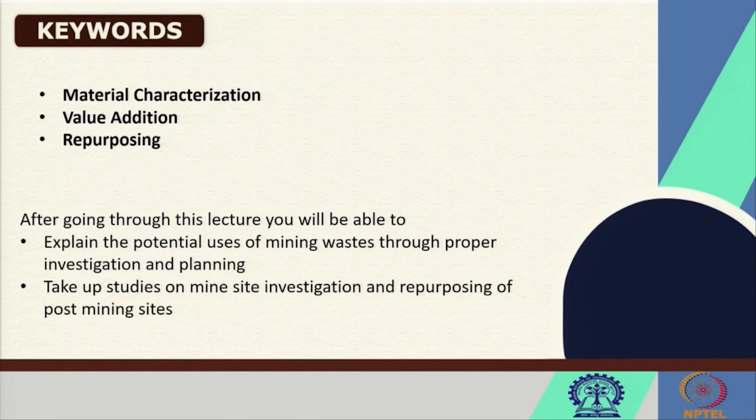For this, it is essential that you get material characterizations done. You will have to know the chemistry, the different testing facilities for geochemical characterizations, and how you can add value to the waste material. But here you will only be learning about the approaches. The detailed work of characterization or value addition will come when you want to get it done, and that will not be done by your own expertise. You will have to hire expertise for that purpose.

But for this repurposing as well, your first task as a mining engineer or environmental engineer is to conceptualize the repurposing, which will be discussed here. After this lecture, you should be able to explain the potential uses of mining waste through proper investigation and planning, and carry out clear investigations. You can then take up studies for mine site investigation and repurposing, identifying what expertise is required and with whom you will build your team. That is the purpose of today's lecture.

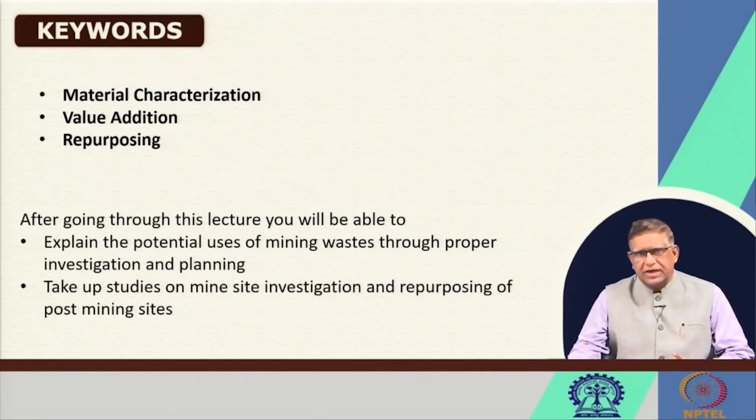Now, what exactly is the resource we are talking about? These are post-mining resources - resources lying at the post-mining site. As we must know, the definition of resource is a stock or supply. That is, it could be money, material, different stuffs, or assets. Exactly, this is the physical material constituting parts of the earth, whichever is there at the time of closure - that will be considered a resource.

But resources can be owned by an individual or an organization. Whether it is an individual resource or organizational resource basically depends on the functions that this particular commodity, stock, or money can perform for you or your organization. That is why resources must be technically accessible, economically viable, and culturally appropriate.

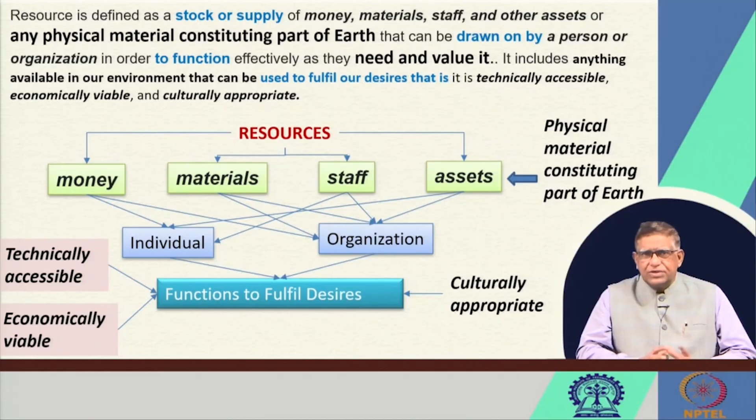So your rice is a resource, but you can use it for making liquor, and then create nuisance in society by getting drunk. That is not culturally appropriate, though that same rice is accessible to all community, can be sold, and from there you can not only survive but bring business to your village. So this basic concept of resource should be clear to you.

Natural materials become resources when humans value them - anything lying around may not be a resource for you. That is why in an abandoned mine site, or after closure, you find a lot of materials lying here and there, land lying there, but if you are not valuing it or making use of it, then it does not become a resource.

The uses and values of resources change from culture to culture and from time to time. In the past, timbers and logs were just cut down and burned to drive away wild animals. But as culture developed, they built beautiful houses with fencing using those same logs, and lived more happily. So culture makes use of resources differently. Resources can be an available means, a natural source of wealth or revenue, a natural feature or phenomena, or any computable wealth.

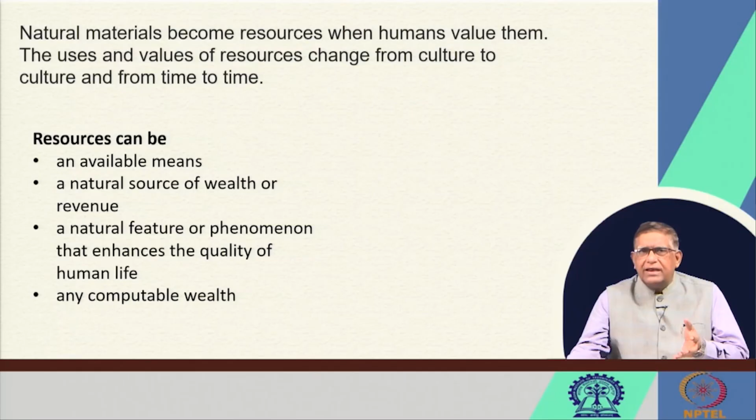And that's why the type of resources could be a renewable resource and non-renewable resource, and then another type called flow resources. There are many natural resources that do not depend on the influence of man, but are neither renewable nor non-renewable. For example, solar radiation, running water, tides, geothermal, landfill gas, biomass, and wind. These are flowing and varying over time, and they do not have a regenerative capacity, but they are also not getting exhausted.

We are getting air, and still in our air we are getting at least 20% oxygen, but it circulates in a flow in a different way. So those are also resources.

Now, resource reuse, which we are talking about today, means whatever is left in the mine site, for the same purpose we can use it. That means there may be a building, a pump, or a water distribution system, and as it is there you can use it for the same purpose of water distribution, or you can take out that pump and use it for other purposes.

Maybe because there is no longer a mining office there, you take out the water supply pump from there and put it in the nearby overburden dump, on which you might have done vegetation, to supply water for irrigation purposes—you can use it there.

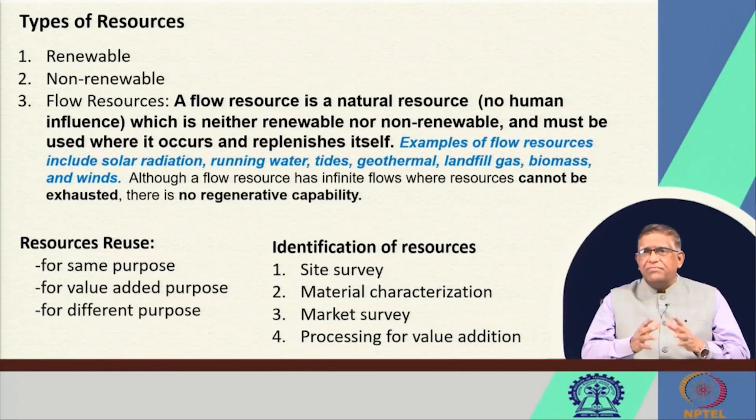So we can find out if such materials are lying over there, collect them, and then engage the local community to revive some of their ancient modes of art and painting, which can have an international market. So we can do this type of processing and value addition of some of the materials lying over there.

For reusing mining waste, you will have to do characterization of the mining waste, which will reveal the potential uses, such as a source of minerals to re-extract, maybe from gold mines, or polymetallic minerals where only one valuable mineral was extracted while others remain in low quantity lying in tailing dams or overburden dumps. In a gold or copper mining overburden dump, there may be stibnite, antimony, or other materials which can be taken out.

Coal mining waste may have residual coal and carbonaceous shale lying there, from which fossil fuel can be extracted. If it can be processed, it could be sent to a power plant for a different type of use.

Then there's the source of construction materials, an area where a lot of work has been done, such as manufactured sand being prepared inside Western Coalfield, repurposing material lying in waste dumps. Similarly, some of this material can be crushed and mixed, then used as a substitute for natural aggregate which would otherwise be mined from other places.

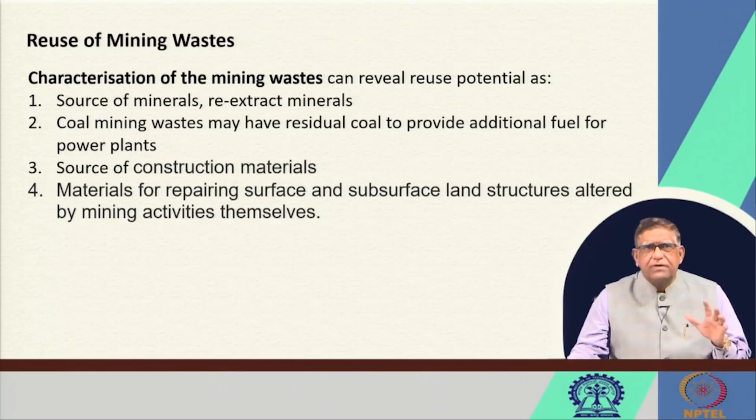Materials can also be used for repairing surfaces, meaning underground backfilling purposes, where you grind, crush, and put the material there. Similarly, you might have seen waste from thermal power stations, fly ash, going to underground mines for backfilling purposes. So different activities can be done with this.

But there is a big problem worldwide. In South Africa, there will be more than a 10 to 13% increase, as estimated in 2017, about 68 million tons, expected to reach 87 million tons this year. It's a huge quantity in that country. Similarly, in the US, mineral ore waste generated is about 1.6 billion tons. That means it's a huge quantity.

And in India, our scenario is we have 1531 operating mines, mining 95 minerals, which includes 4 fuels, 10 metallics, 23 non-metallic, 3 atomic, and 55 minor minerals. A huge quantity of minerals are being mined.

Now here, everywhere the mineral concentration is not uniform. In different places, different degrees of waste will be generated. So if we see the Indian mining waste generation, one study is very urgently required to find out and have proper data or information about these wastes lying there, because if they are not reused and properly managed, they may create environmental hazards.

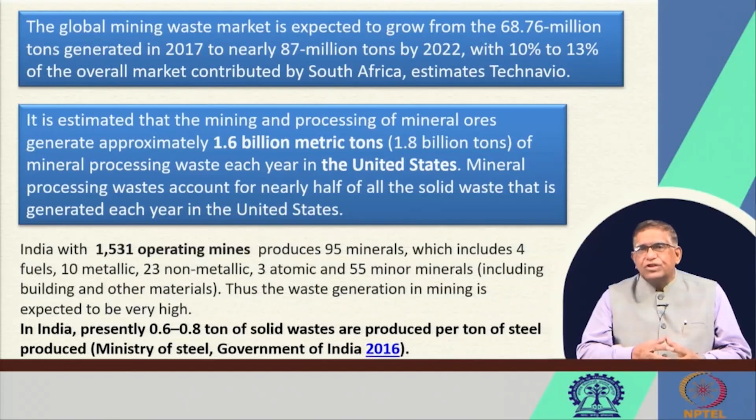Now from there, how it can be reused, a lot of things are there in the cement plant, because in iron ore making, in slag you add limestone, keeping a lot of calcium oxides, and that's why this can be used in the cement industry. So we have a lot of possibilities of using that material.

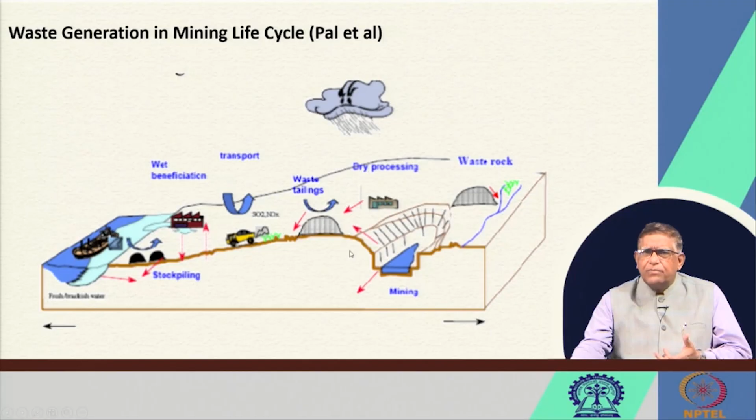Repurposing is exactly getting the beneficial use of the closed mining or other industrial operation, through value added reuse of the land. As you have seen, you might be having this pit, may be overburden dumps and all that, this is a different type of topography. Now how can you make it a different type of land use?

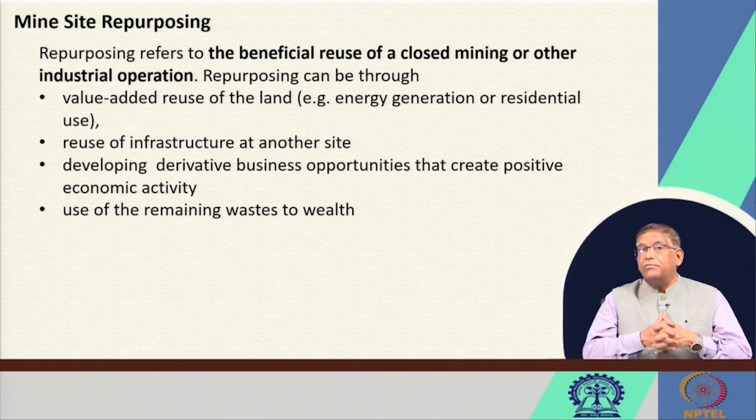So whether you can use it for energy generation, that means solar panels and wind panels may come over there, or a residential township can be developed, or reuse of infrastructure at another site, or developing derivative business opportunities that create positive economic activity, or use of remaining waste to wealth, what can be done.

So this transition can take place through rehabilitation or remediation, that is you can create a non-polluting environment where there were pollutions. Now you can regenerate and reclaim, restoring degraded ecosystems, whatever has gone wrong you reclaim it, and then you can repurpose the mining infrastructure and landscape for other activities.

That repurposing is other than mining, something as a sustainable business can we develop, and sometimes it can be co-purposing, meaning developing beneficial activities on site during mining. Where mining is going on, at the same time you are developing certain things, like fisheries, agricultural land, horticultural land, simultaneously.

Or if you are having huge good sandstones, you can bring artists and sculptors to make a lot of different type of sculptures that can be sold, and engraving from those sandstones. Many of our mining sites have had a lot of such beautiful sandstone which could have been created into monuments for different hotels, buildings, and places.

We do not have many rock gardens. Even the places where we teach mining engineering or geology, those institutions don't have a rock garden. That rock garden could have brought lots of overburden materials, could have been converted, provided we have done that co-purposing. We are developing different types of CSR, bringing artists, making artifacts and putting them over there.

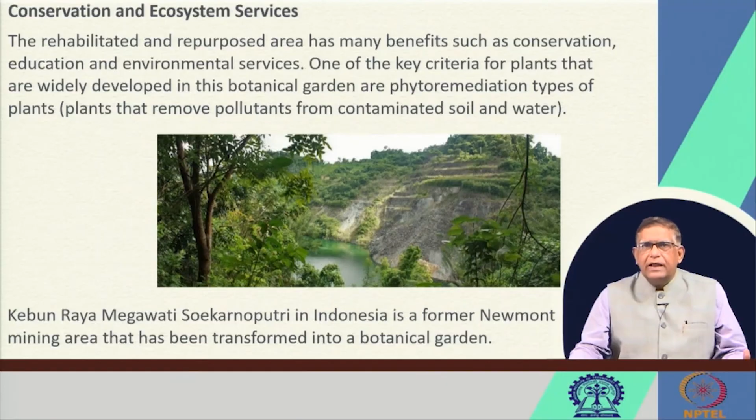Similarly, you can think of what China does. This is a Chinese mine. You can see it was an abandoned mine quarry. In the abandoned mine quarry, what they have done is create the Shimao Wonderland Intercontinental Hotel. This 16-floor hotel has come up starting from this pit - a mine pit where the pit water was, I think it was a limestone mine. So they have taken this over and created a mega structure like this.

So similarly, we have also got many stone quarries. Nothing is there - in many of the manganese mines, like Tata's manganese mine, old quarries are lying there near the Barbil area.

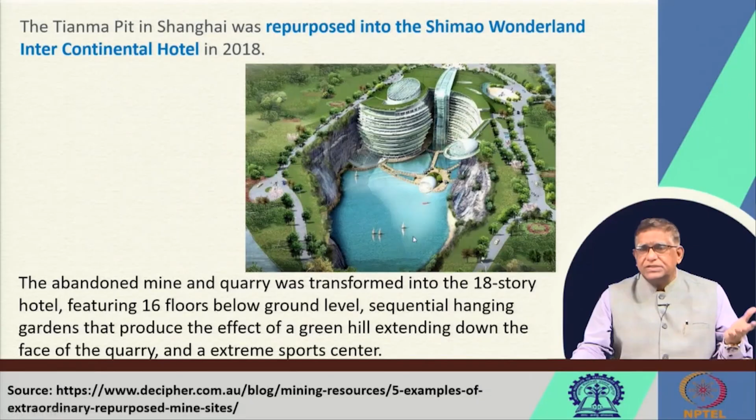But nearby, in some other places, some quarries like this are also potential places lying there. So we need to do that repurposing.

So when we do this, you can see another example. This is how in Norway people have done it in an underground mine. This mine, the Lefdal mine, has been converted to a data center - a data center which requires a huge amount of power and servicing. Huge data centers have come up in this old mine. Why can't we do similar things?

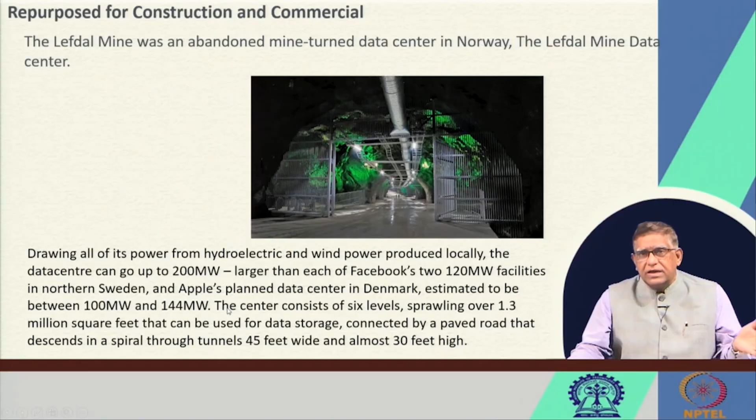We can also do this, but we have not done it. Even now, we have not studied how we should repurpose our Kolar gold field which has closed, our Kudremukh iron ore mines which have closed, and there are many closed coal mines around. Even very recently, 21 mines of WCL were closed, but we do not have any repurposing plan.

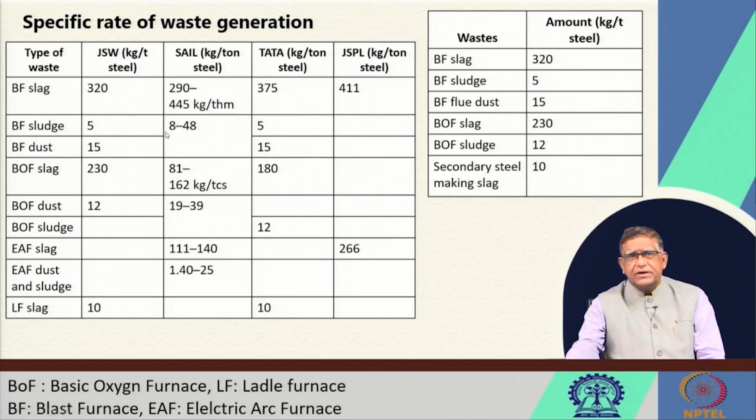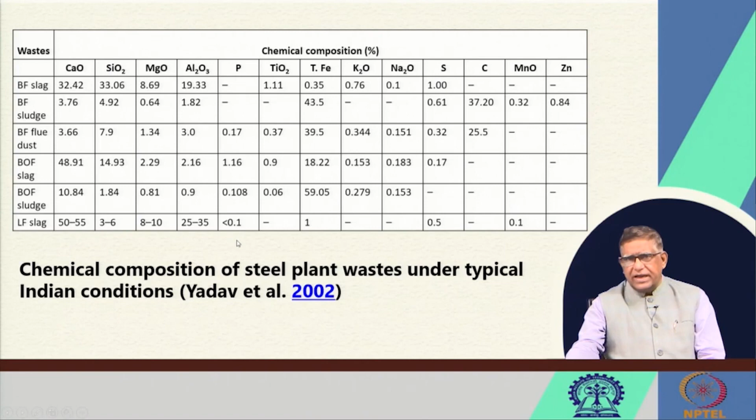But there is another thing which to some extent we have done in our country - we do find out how much slag gets generated. The steel plant waste has been characterized well, and different steel plants produce different types of slags which are characterized and can be used in cement plants and other plants, which is also being used to a certain extent. There is other material too, which can be made into aggregate for road making - that is granulated blast furnace slag, which can be used in cement production.

Some of these materials have characterizations that tell whether they have pozzolanic nature, which determines the type of cement they can be made into, like granulated blast furnace slag, which is pozzolanic in nature and naturally fit for clinker in the cement mix. In the cement plant they take out a lot of the slag, but some still remains lying there, and because it is alkaline in nature, it increases the alkalinity of the soil.

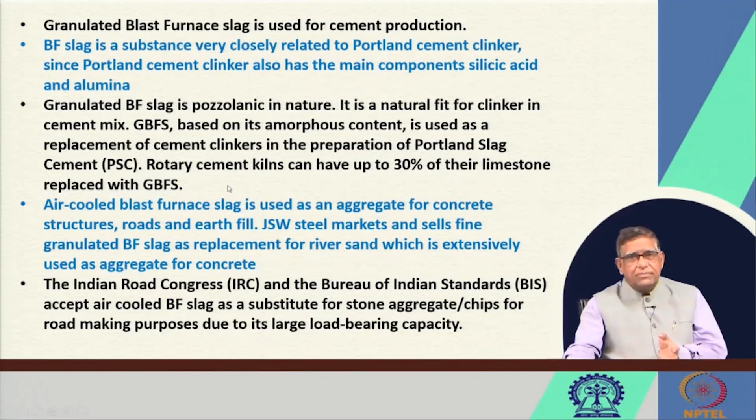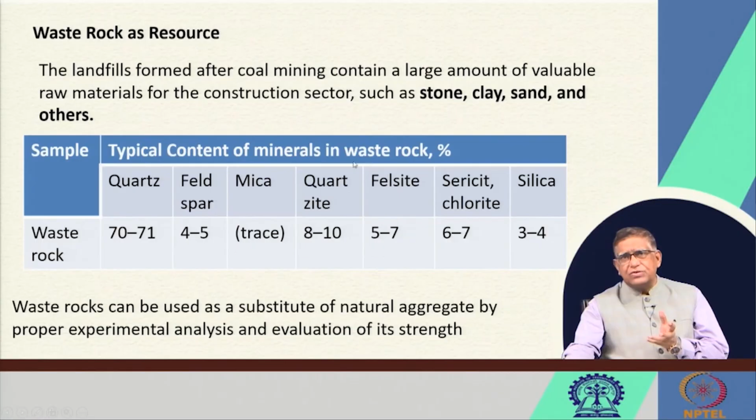So we need to study how to handle that. The waste rock, other rocks available at the mine site, can also be used, because there may be quartz, feldspar, mica, quartzite, felsite, chlorite and silica. All these things are present as stone, clay, sand and other material in the overburden site. Some of them can be used for construction purposes, road making, and other things.

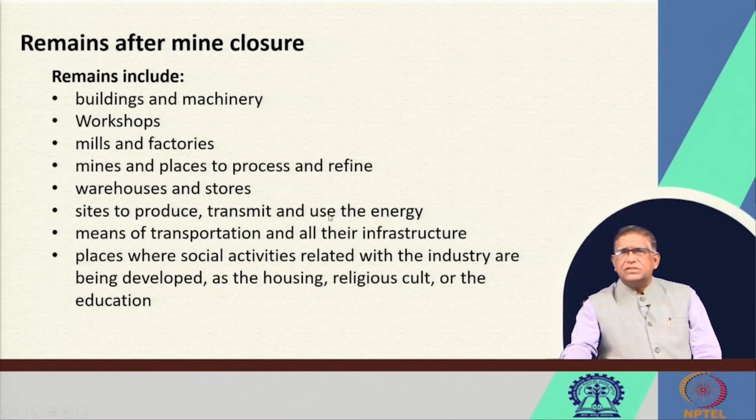The remains after mine closure include many buildings, machinery, workshops, mill factories, mine plant and processes, warehouses - so many things are there. You need to find out how they can be used. That is the reuse of the remains and the waste-to-wealth conversion. This has to make you think of how you can recover the value.

Sometimes, as we discussed in our previous class, we do the demolishing before relinquishment. We demolish things, recover some material, and then use the site for repurposing. That repurposing could be development of ecotourism, edutourism, edutainment, entertainment, or other commercial use.

Sometimes I mention that in our cities like Lucknow or Calcutta, there are a lot of jails. The jail where criminals and qaidis are kept blocks a lot of space in the main cities. Those jails can be shifted elsewhere, and the labor of the criminals in jail can be used for reconstructing those sites, releasing a lot of commercially valuable space in the main cities.

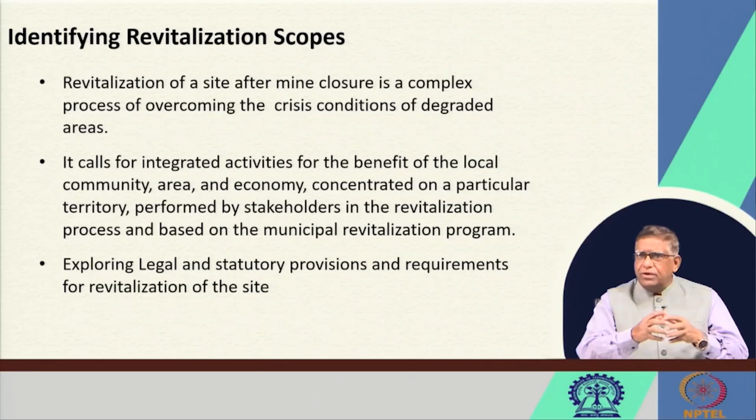Identifying the revitalization scopes and revitalizing the site after mine closure is a complex process of overcoming the crisis conditions of degraded areas. So revitalizing is possible, but you will have to investigate, and then find out what type of post-mining use you will be making - whether agriculture, forest, aquatic, natural, economic, or cultural aspects.

So when you want to do post closure or abandoned mine management and think of reusing, you will have to do a little detailed investigation. There are revitalizing procedures that they follow in Poland. You can go through the net, and you will have to prepare some of these types of flow charts. Just try to study them.

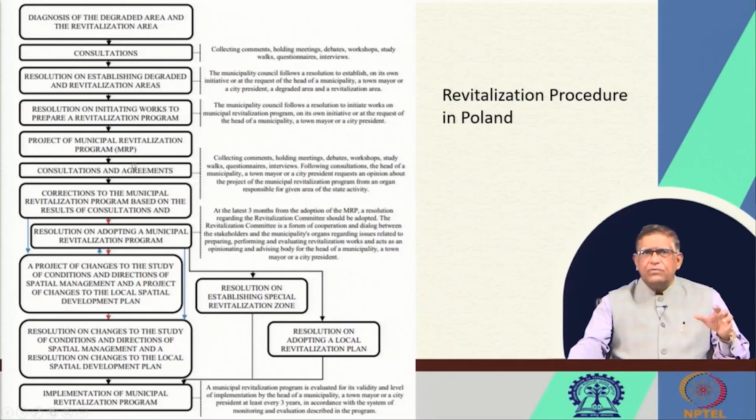This is just to give you an idea that whenever you want to do any work, you will have to systematically develop flow charts, so you can think of reuse of the mine site. The waste materials require proper investigation and waste and resource data segregation - which can be converted to resources needs to be found, and waste will have to be retained at the site in such a way that it does not release any contaminant. Certain constructions can be carried out which add value to the site and could be commercially viable, so careful planning is necessary.

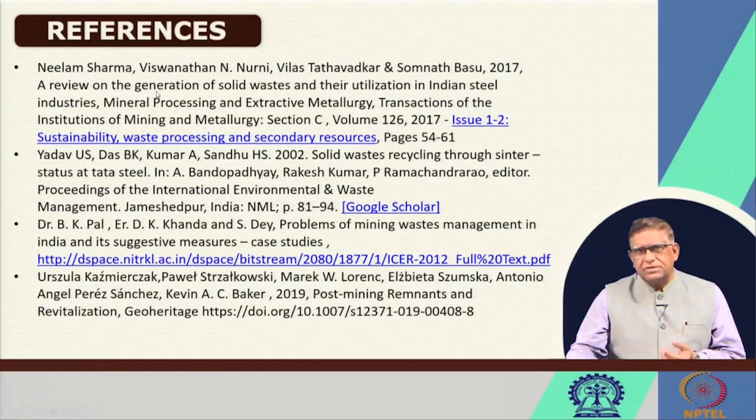So this is just to give you an idea. There is a lot of literature available - plenty of literature - but don't get yourself lost in the literature. What you need to do is think of a potential use, and start thinking how a business can be developed in the abandoned post-mining area. This is just to give you a bird's eye view of the subject. The whole thing we are doing here is just to make you aware, so that you can now take up some learning activities on this line. Thank you.